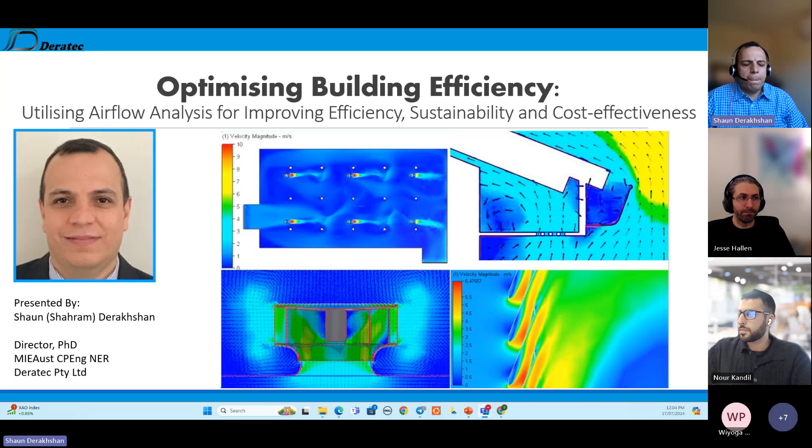So, who are we is a simple question, but a lot behind that to answer. Definitely the business owner knows what I mean because building a good company or engineering group is a lot of work. Deratec started in 2019, definitely involving all required certificates for Australian engineering, but because of COVID and some issues, we all paused. So in 2022, we started to help our clients. Most of our focus is using advanced knowledge and engineering tools to present and help them with performance solutions for different categories: residential, commercial, industrial. For Australia, we definitely comply with NCC and Australian Standards. I also have some clients from overseas, and we follow international standards, same as ISO. So the target is definitely sustainability, safety, comfort, and cost saving.

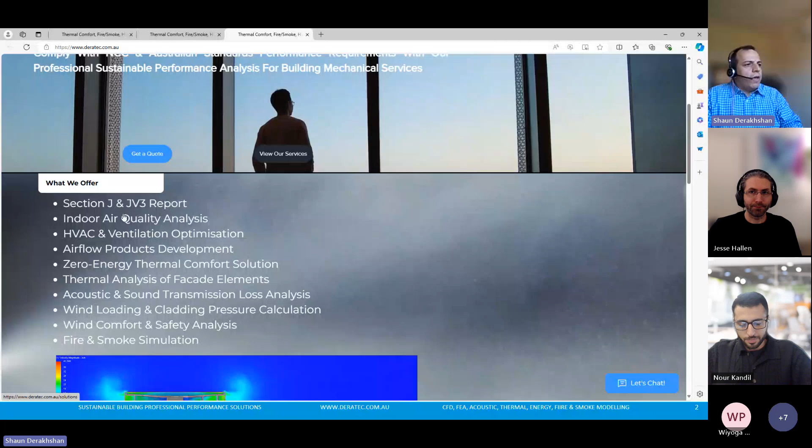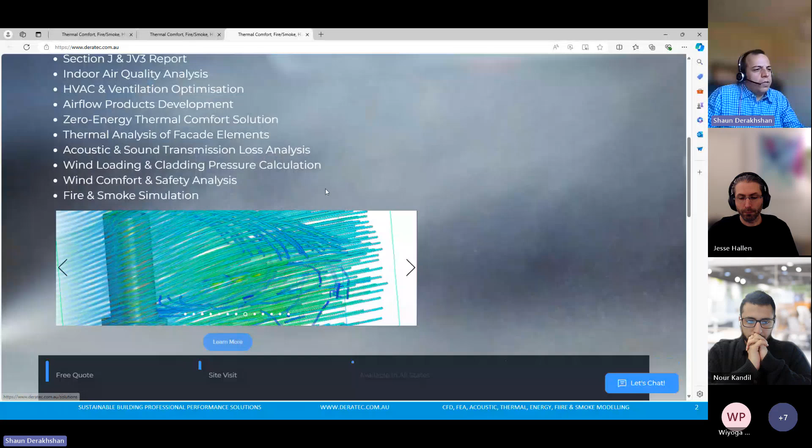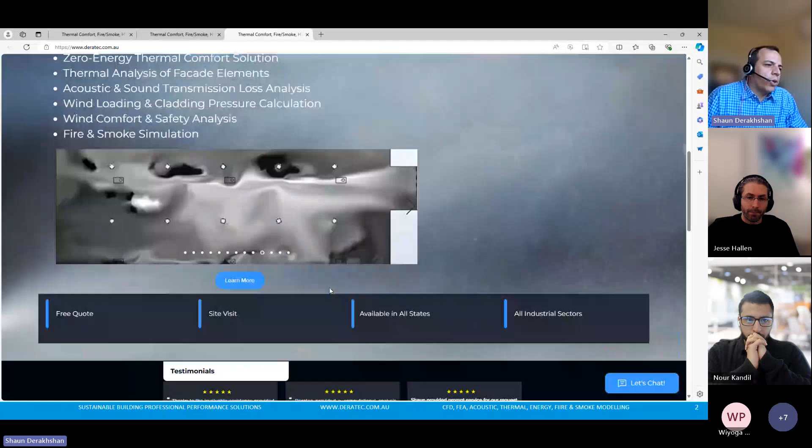So let's have a quick review of our website. Safety, we will talk about it today. We also provide Section J and JV3 modeling reports, acoustic analysis, some FEA, combined with wind loading, fire, and thermal analysis, and a lot more. You can dig in, and we have some happy client reviews from Toshiba, Hindmarsh, Innowood, and more. That's how they are happy, and this is what we are doing, keeping high quality, but we are very fast to answer our clients.

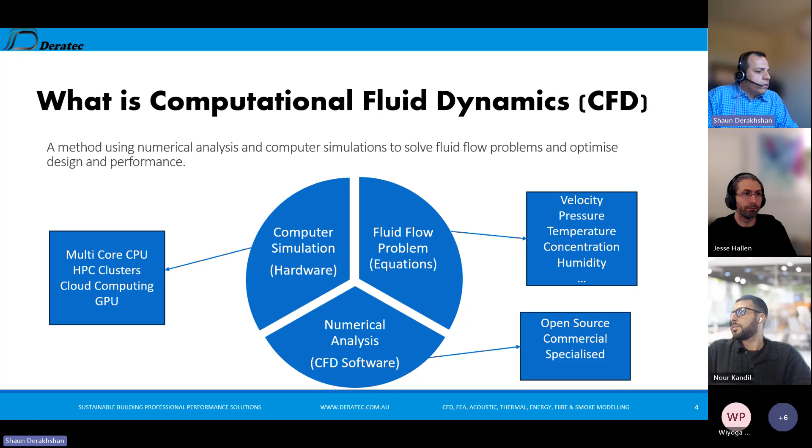We will have a lot of development, maybe AI involved in simulation, especially CFD, so we can decrease cost and time a lot in future. I know a lot of commercial CFD software companies are investing time and money in R&D about AI involving CFD.

So this slide, I think, is the most important slide in this presentation, and it's a very simple question but definitely needs a very accurate answer: how can CFD be beneficial? So we're starting from design.

When we talk about design, design comes from the initial consultant engineer, mostly what we call deemed-to-satisfy, based on standards. If I can illustrate it for you, imagine deemed-to-satisfy is most of the time like a key, but you need to open all doors with one key. That's impossible - you need individual keys to open individual doors.

This is the reason it's sometimes not an optimal design, and definitely an expensive solution, because the consultant engineer may have no time, or the contract terms didn't allow them to go into detail. They call it 70% detail design and 30% contractor or supplier, and that 30% is the main part most of the time.

So how does the game between contractor and consultant companies go? I'm not saying all the time, but most of the time it's copying from other projects with just slight changes, because of time constraints. This is the reason we need to redesign before application, or at least evaluate the design.

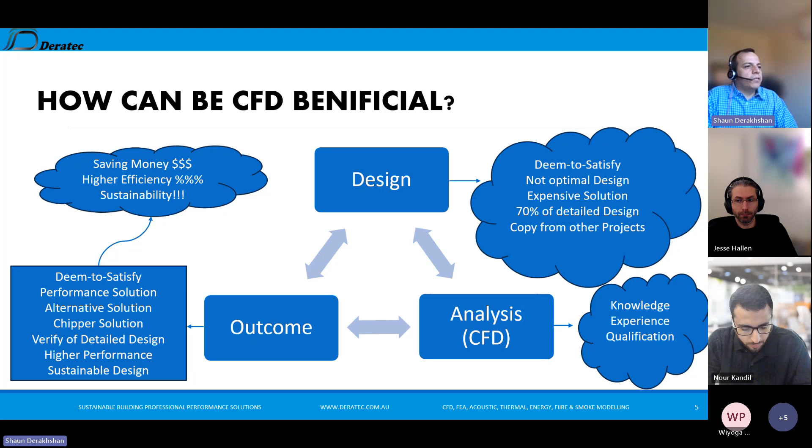Anyway, so let's move on. We can talk about CFD applications in buildings a lot - we could extend this list definitely, but let's just focus on categories: indoor and outdoor. Definitely indoor air quality is one of the most challenging here.

This is related to car park, kitchen, fire, and smoke. Healthcare - hospitals or aged care - safety is important over there. The second category is heat, cooling, and ventilation modeling: HVAC, thermal comfort, energy efficiency, mechanical, natural, and passive ventilation. It's very vast, very wide, and just a general note - 30% to 50% of a building's energy bill goes to this category. So it's very important this category be optimized to save costs for clients, mostly long term for running.

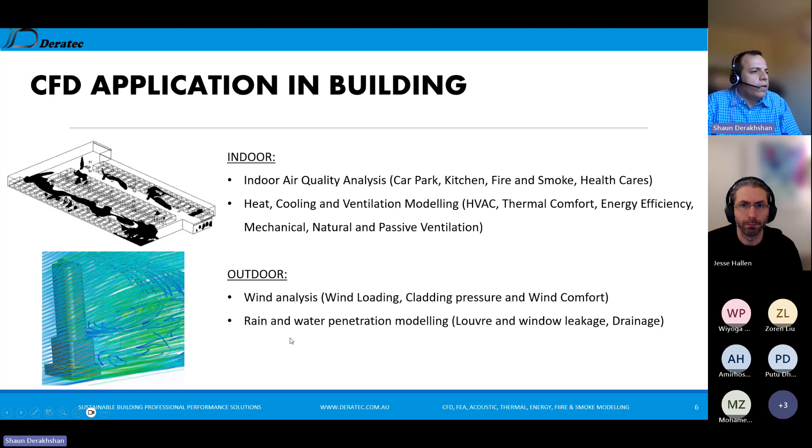So outdoor, we definitely, when we talk about buildings, wind is a big challenge, so wind analysis. We talk about wind loading, cladding pressure, and wind comfort - we will discuss these in one slide. And rain and water, because we always have wind-driven rain, so facade elements - facade, louvers, windows, or roof. We have a lot of penetration and leakage issues. So we try to have a case study about louvers to see what's going on.

So yeah, indoor again: car park, kitchen, healthcare, fire, and smoke. If we start from health - it can again be applied everywhere, outdoor too. So we have some source of pollution - it can be everything. And we are able to show in detail because it's 3D.

If you wanted to do something like that in reality, it's very expensive - you need to install sensors everywhere, even in a laboratory. But CFD has the ability to show in 3D what's happening, where the dead zone is, or how it's going. If we are designing ventilation, it shows how it works.

So another application can be kitchen. Kitchen is the main source of pollution in urban areas. A lot, I think in Sydney we have a lot, especially in CBD restaurants, commercial restaurants, and you can always smell the burnt oil smell, and this is poison. So when we talk about kitchen, we talk about hood design, how filtration is going, or this exhaust - how much percentage of this contaminant is going to the streets, and you need, as a designer, to get council approval for that.

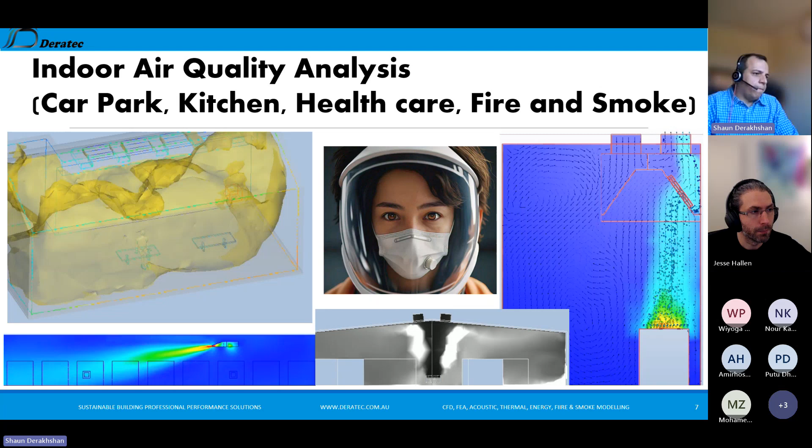Another category is fire simulation and smoke visibility. We are not talking about fire design, because this belongs to the fire engineer. We're talking about simulation and visibility. Maybe the fire engineer wants to see the ventilation design, or whatever design works for exhausting smoke. So CFD software is in a position to show 3D visual, 3D smoke visibility, and a lot more. We also have specialized safety software for smoke and fire on the market, so it depends on the application we use.

Let's start with one case study for a car park. This car park is a very big car park, 252 parking spots. It has a mechanical system, 2 exhaust and supply fans, and also intake air from the ramp. So we are looking to decrease jet fans from the initial design.

Because the initial design had 18 jet fans, and we are looking to optimize the design, a 50 Newton jet fan was selected based on the initial design, and then the geometry was built up. The geometry is suitable for CFD purposes - we don't need a lot of mechanical details, just simplify it for mesh generation and apply the jet fans.

The result for this particular project was decreasing 18 jet fans to 12. The 1 hour average CO is 45, less than the 60 ppm required by the standard, and the 1 hour maximum peak is 85, less than 100. So this solution complies with NCC and achieves almost 30% cost reduction - I mean in upfront cost, because definitely running costs are also decreased.

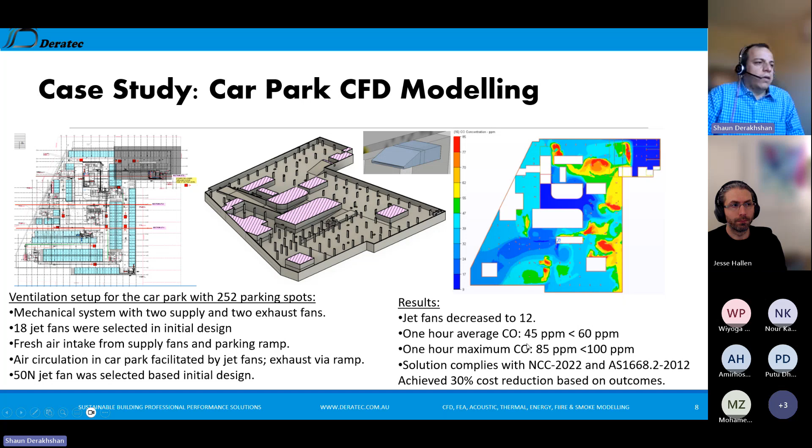We need to check 1.5 or 1.8 meters above the floor, and also at 750 millimeters - for example, where a child or kid might be going, asthma is very important. So a wrong design can kill someone. It is very important.

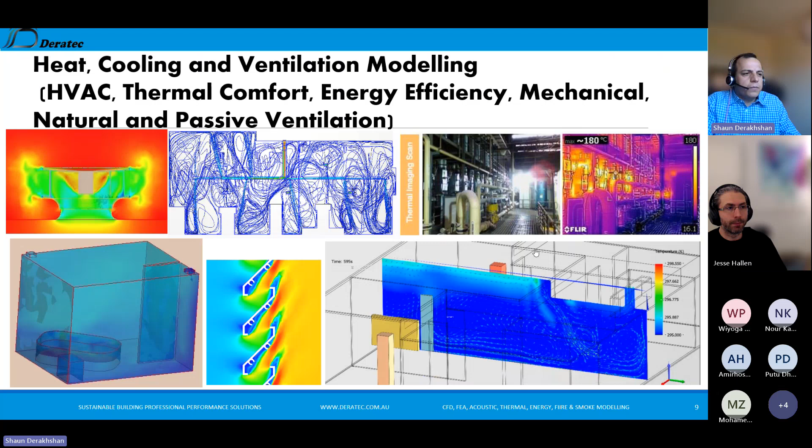As a case study, we can have a look at that factory thermal comfort project. This special project has a lot of machines, but here it's simplified, just a case study.

We have a heat source, so we need to manage this heat source. We have an initial design, ventilation design. First, we evaluate if it works or not, then change the design, optimal design. Maybe it takes 2 or 3 or 4 times simulation. This is a good thing about CFD - we can change geometry, see what happened, and then come back and refine geometry. So it's not easy, but it's possible.

So the target is compliance with ASHRAE 55 standard thermal comfort. It's not an office, because PPD and PMV levels for human comfort apply for office or residential. Here, this blue area - but because it's a factory, we are using natural ventilation, ridge vent, louvre or fan. We're just decreasing the temperature, bringing the temperature as low as possible.

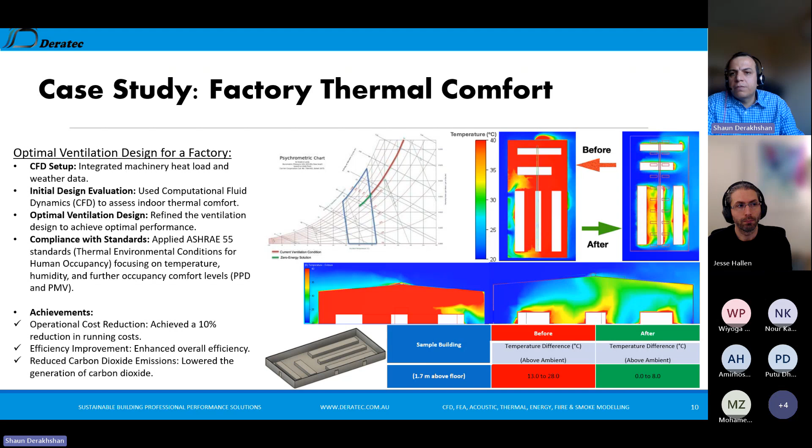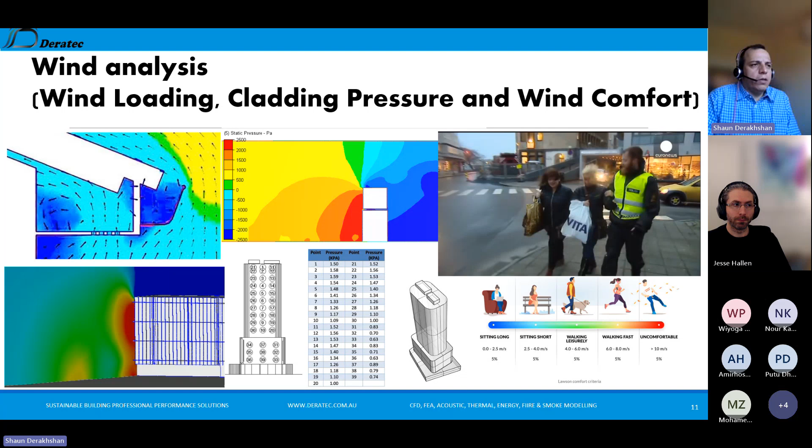So, just as a case study - I'm not sure if my client was involved in the design here. So we did, okay, the problem was, this is a hospital. The problem was with the cladding. We have one cladding here, then top hat, then some brackets, then insulation, then one plate they call a backpan, and then internal wall. The problem was that the consultant engineer insisted on designing this backpan pressure the same as the external cladding pressure. This meant they required 0.9mm or even more thickness for this sheet metal, instead of 0.7mm that they had used when they participated in the tender and won based on this.

So this was a huge money issue - imagine a big hospital and the whole facade, it's a huge money difference between the thicknesses for them. So this challenge was why they reached out to us, and we got involved and helped them with CFD. We calculated the pressure reduction in gust wind, and you can see from here, definitely here is the outside and here is the cavity inside.

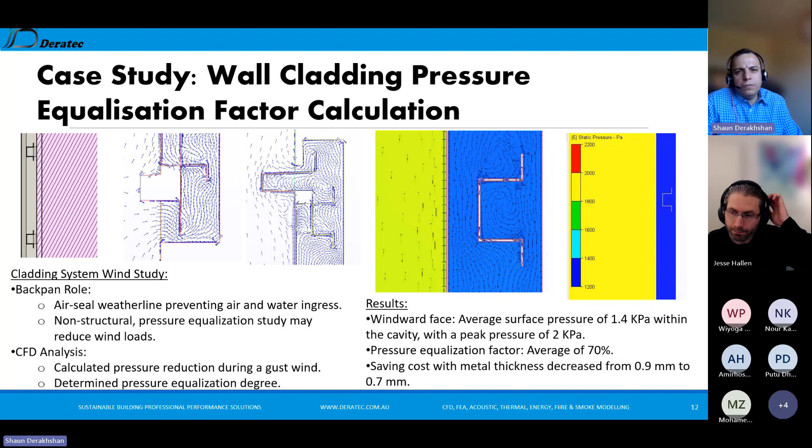Another category we can cover is rain and water penetration modeling. You can't imagine building design without considering rain, because all building designs consider wind. For example, for Sydney, 50% of days a year, even more, just to give an idea, we have rain, and sometimes, especially near the ocean or high wind areas, we have wind-driven rain. So we need to consider rain and water penetration, especially in facade element design.

When we talk about facade element design, it can be from louvers that are open, windows, doors, cladding, cavity, brick, and anything in the facade can be put in this category.

So we have different standards to apply. For example, for windows, we have different infiltration or penetration standards, different for residential properties versus commercial, depending on building class. In Australia we have classification; definitely every country has its own standard. So depending on the classification, all tests are done in a laboratory.

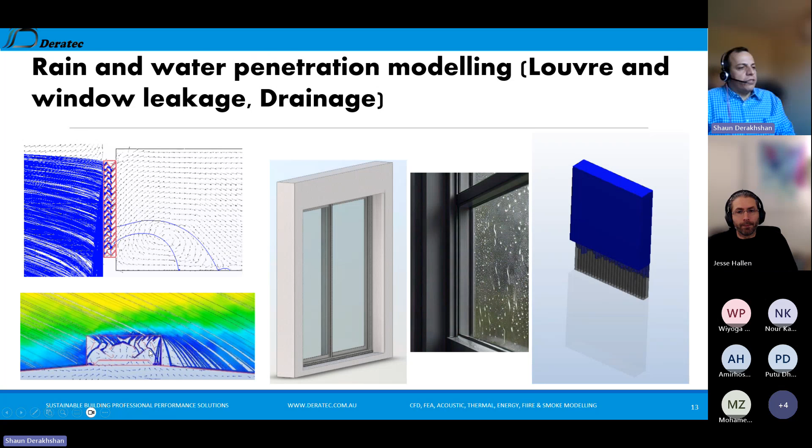A $500,000 car just had water dropped on it, and they weren't happy because it's a very expensive car and a lot of rain may have damaged it. So sometimes we think it's a simple design, but a wrong design can affect a lot for the client.

Let's consider this case study as a rain resistance performance test, a visual test for a louver. This test is based on AS 4740.

The standard says you need to test for heavy rain flow rate, 75 liters per hour per square meter. That's very heavy rain. Also wind needs to be considered, or airflow of 0.5. If we consider 1 by 1 meter, it means 0.5 meters per second to 3.5, sorry, airflow, and I forgot to put here the wind.

Wind needs to be 13 meters per second in the middle, 1 meter before the louver. So wind needs to be 13 meters per second, and also we have some airflow. The target is testing and classifying this louver. For example, class A means 99% or whatever can resist against rain. That's class A, then class B, class C, and class D.

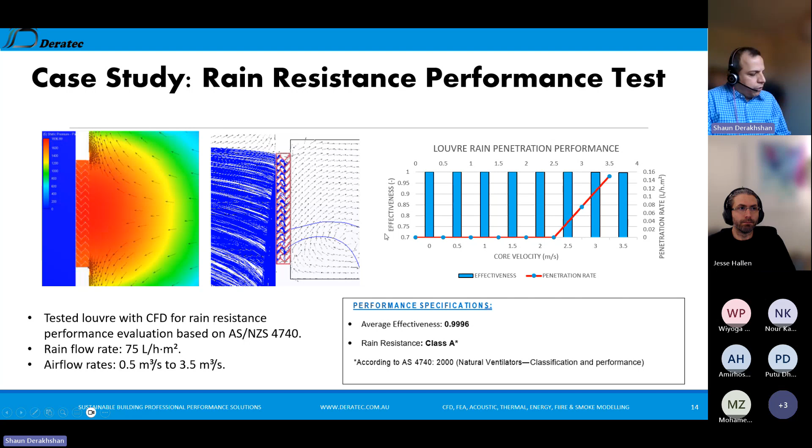But sometimes contractors also, in projects, need to verify this louver, whether it's good to go or not, or this window or this door. So we can help with this simulation. So we have 10 minutes.